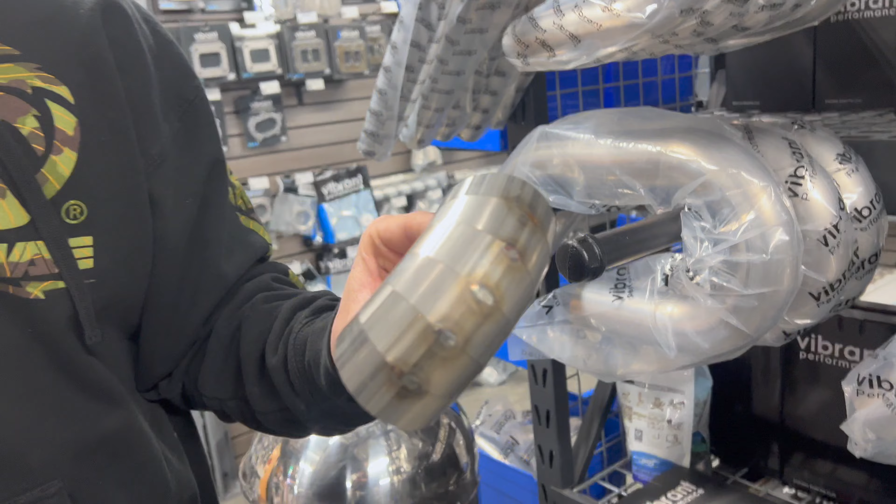We are setting up the bump stops right now, trying to figure out how to take the nitrogen out of the bump stops so we can set the height up on it. We need to decompress one of them at least and go from there.

I'll show you what we've got done so far on one side. So all the electrical, had to tear the fuse box apart, pull all the electrical out of this side. Most of it's wrapped up there, the ECMs and all that stuff, or whatever they are. I don't know that much about it, but this guy's tacked.

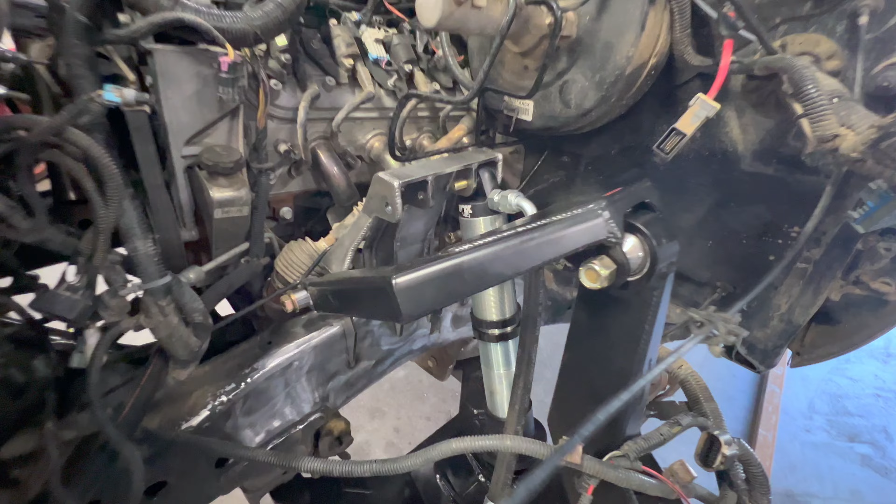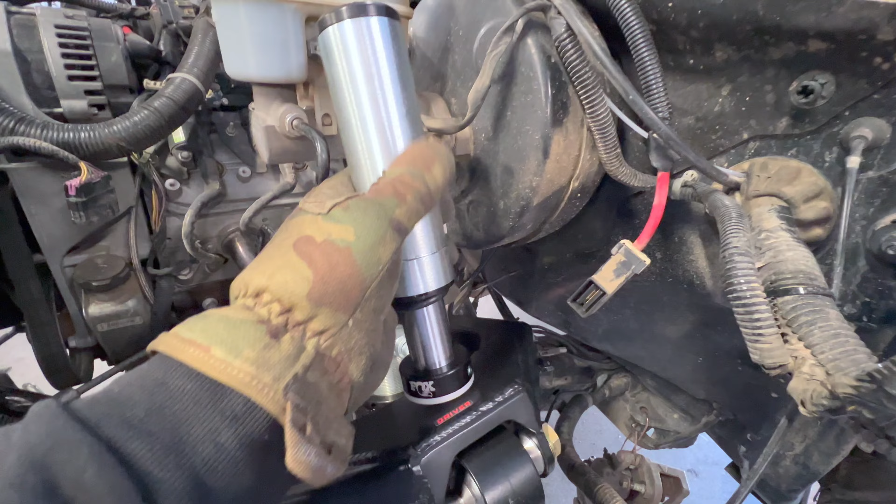Now we moved these brake lines. We had to spread them because the bump stop is going to sit pretty much like this. That shit is all in the goddamn way. It'll be sitting more like, I guess, like this, actually. Compressed right here.

Here's the kit, she's nasty. We still got to plate the frame. All that's got to be welded in. All their plating's got to be done.

Sean's going to draw some stuff up in Fusion 360 to mount this guy. We're going to plate it in real nice, and then we got to build a brace over the top, relocate my fuse box, do a bunch of wild shit like that, and then keep moving.

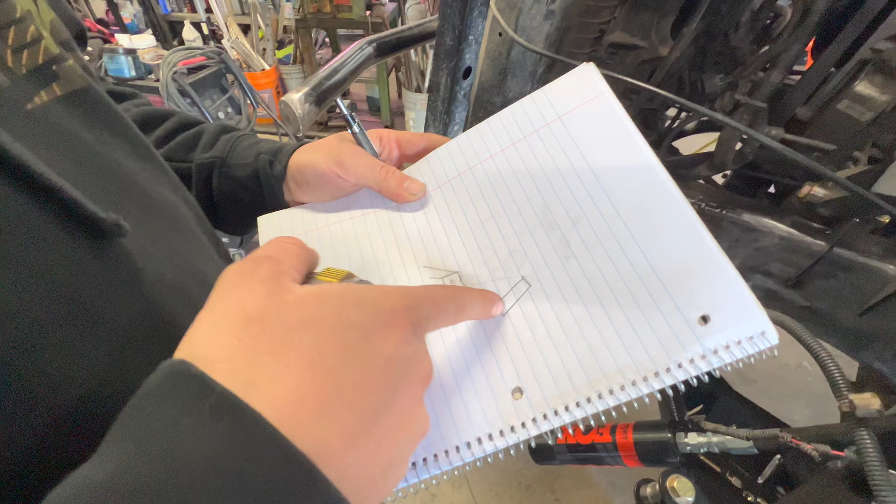Locate where that bump can is going to be. And then we can maybe even take another triangle measurement off the back. And in theory, that would give us the location of that bump can, I think. Right? Yeah, sounds good to me. We can get in the general vicinity, then we can just cut and weld as we need to.

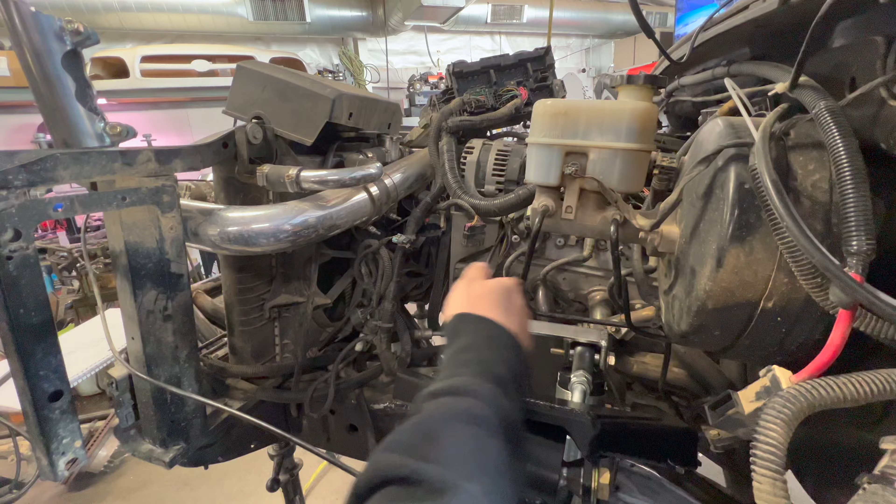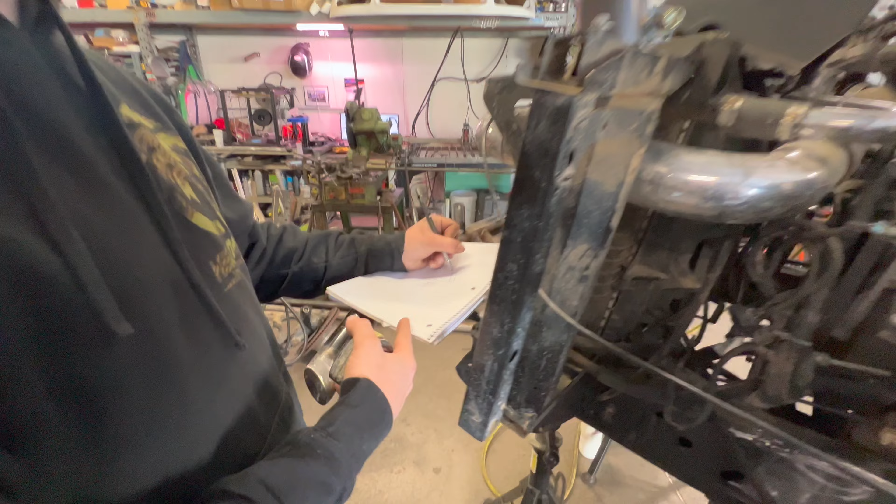Yeah, we'll have some play to go like this. We could also take a reference of this angle here with an angle gauge and this angle, and that'll just be more information we can plug in. Then we could probably do it with one triangle.

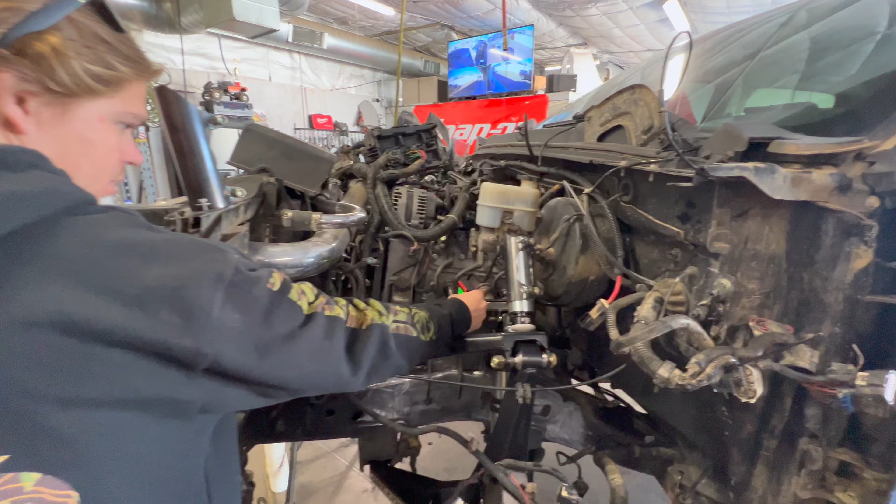Okay, so if that's our 0, our bump can here, take a little look from the front, Ryan, see if that angle looks pretty perpendicular to this. Looks like it needs to come up in the back a bit. Yep, looks like she'd be hitting straight on pretty much.

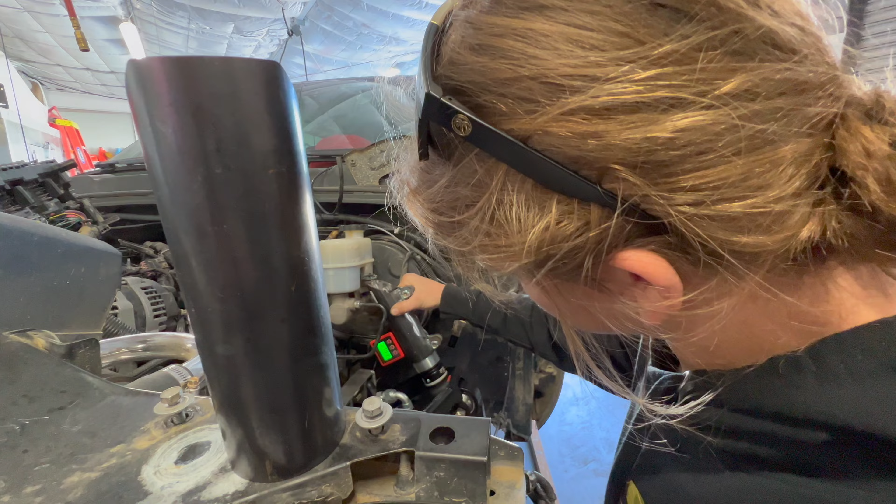Okay, what's that reading there? 58? Bunch of shit, 57.9? 57, yeah, 57 and a half.

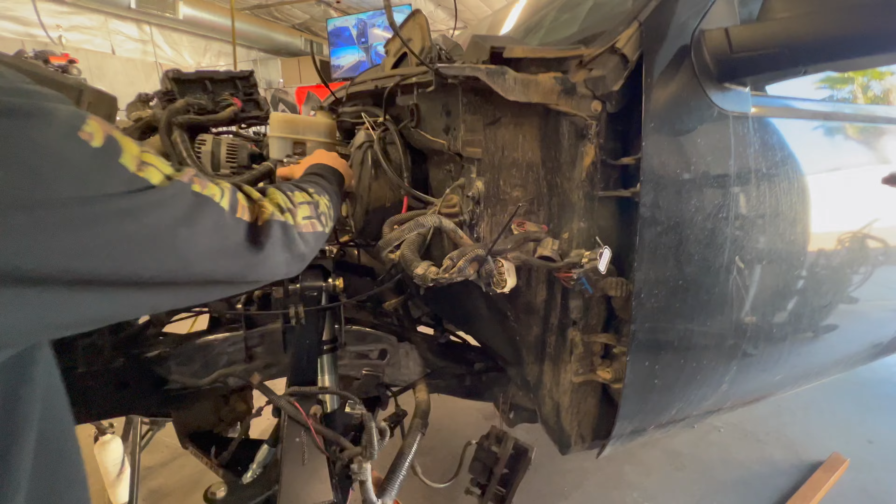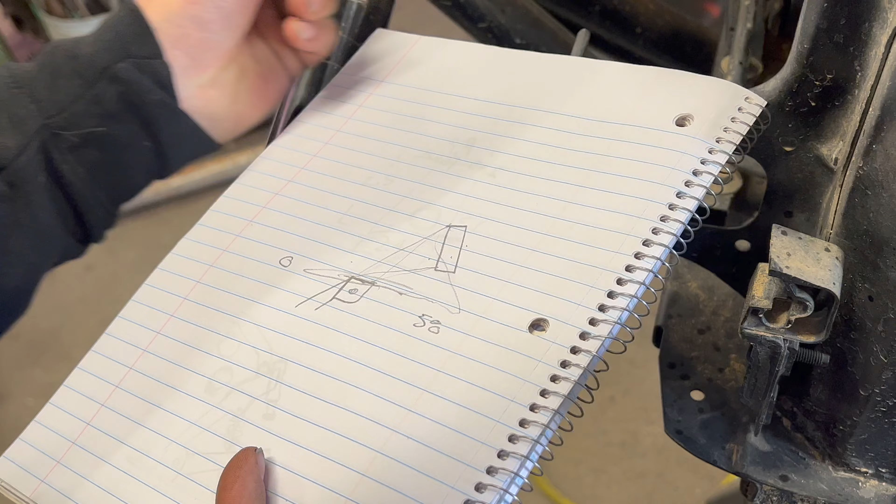This plane is 0, right here, this is our 0. This angle here is going to be 58, and then we just need that measurement, and I'll be able to go into Fusion and locate that tube, and then we can draw our brackets on there and mess with it, as opposed to sitting here with cardboard trying to figure it all out with scissors, cutting, and we can make it happen in there.

So, the old laser cutter, eh? Yep, let's get this kind of held about where you want it, and then let me take 2 measurements off here that we can use.

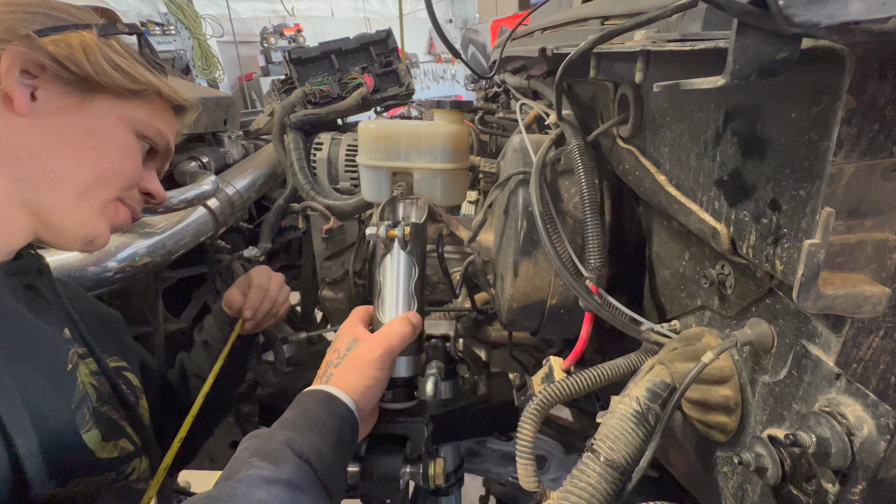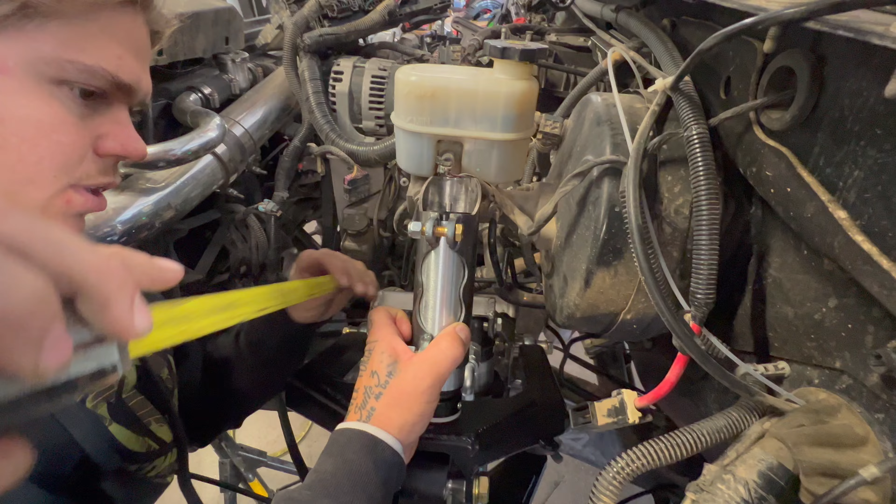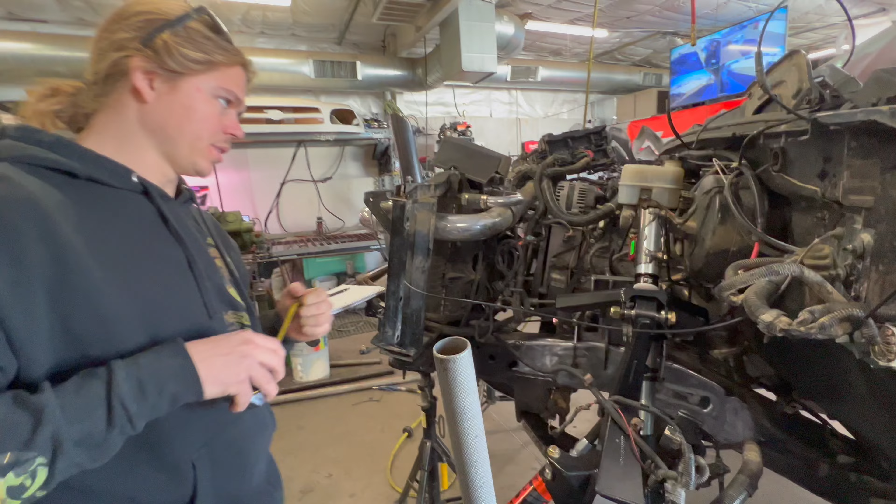It'd be important to probably keep that on there, that way we can make sure we're still around our 58. It's got to come up from this point to, let's call it 6.5, and then the lower end, it's maybe about -- can you move your ring finger? Like 4 3/4. 6.5. 4.5. We need one more thing, which will be distance between where I reference those measurements. Call it 5 for now. Okay.

Where is the bump can, just so we can kind of take a couple measurements off it real quick? Sure.

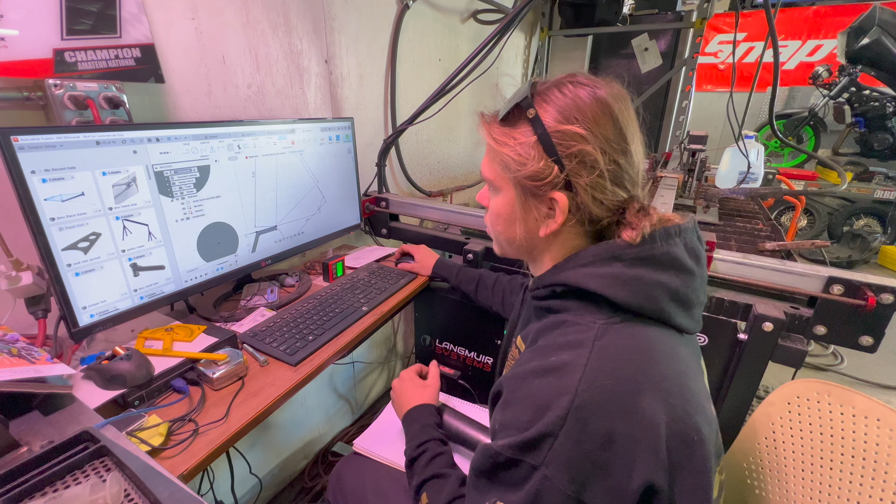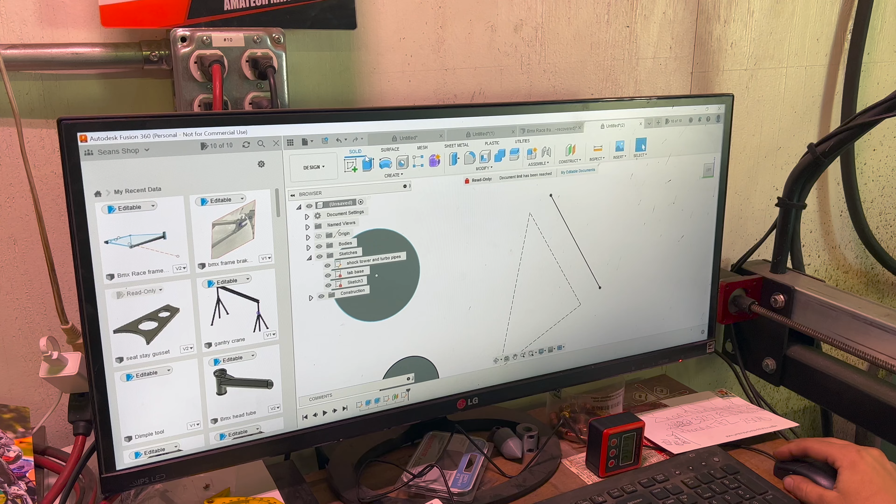Okay, beautiful. So we know that this thing is 2.3. So I'm going to go over here and I'm going to create an offset off of this, and I'm going to go 2.3, but I need half that distance. So you can put math right into Fusion, so I'm going to divide that by 2. That's the center line of our bump can. This will be the back edge, and then I'm going to finish this sketch. I'm going to create a pipe right here, and this section we want this to be 2.3.

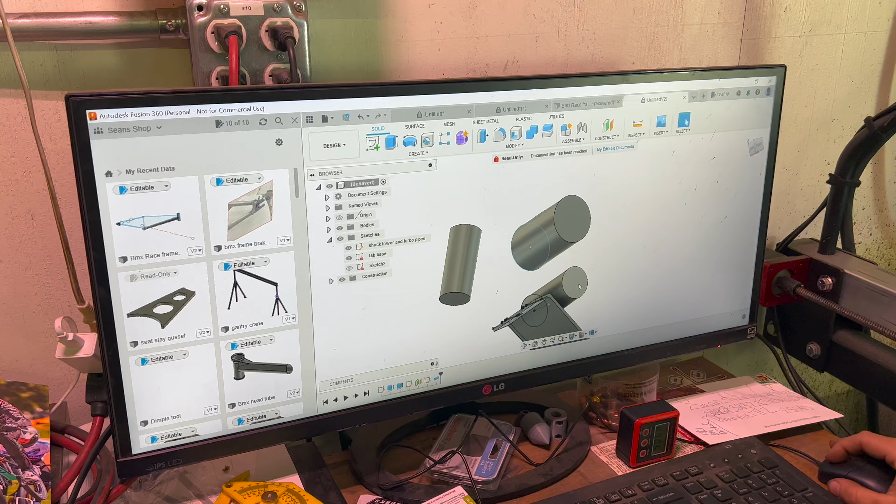Okay, so big old pipe. I kind of got our turbo pipes in here about where they need to go. We can adjust them if we need. And then this is the angle of our bump can, and we need to build tabs from here to here. Looks like it's going to clear the turbo at least.

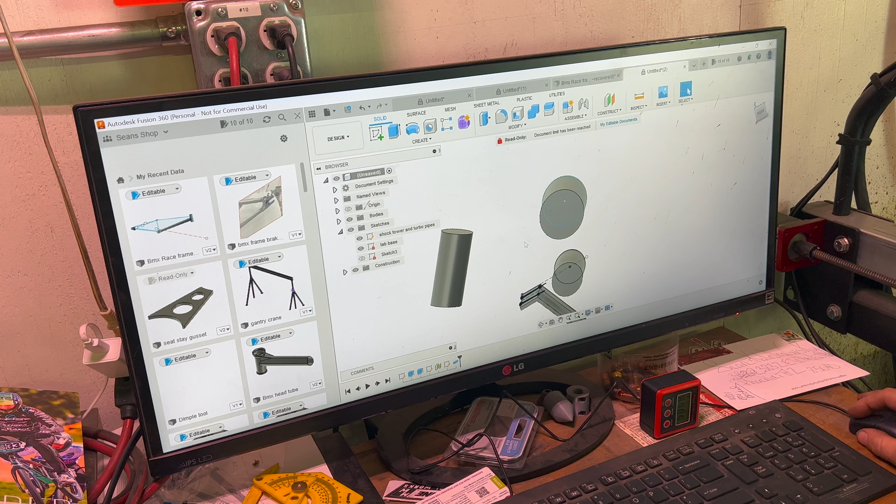Yeah, the biggest thing we got to worry about on our turbo end is where we incorporate our cross brace strut coming over. So this might get in the way for that. This might be pretty tight once we start building. If you ran here, the mount up high for the cross brace and kind of went up over the top of that.

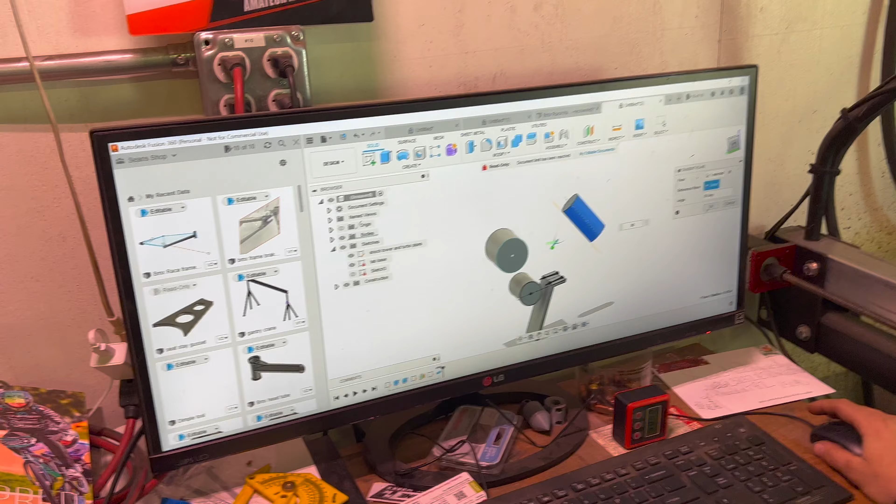Connecting multiple points on Fusion can be a tricky endeavor. So now we have a plane we can sketch on, which is basically the backside of this bump can. I also want to construct an offset plane off this plane and bring it back a little, because I want to grab this bump can a little further up.

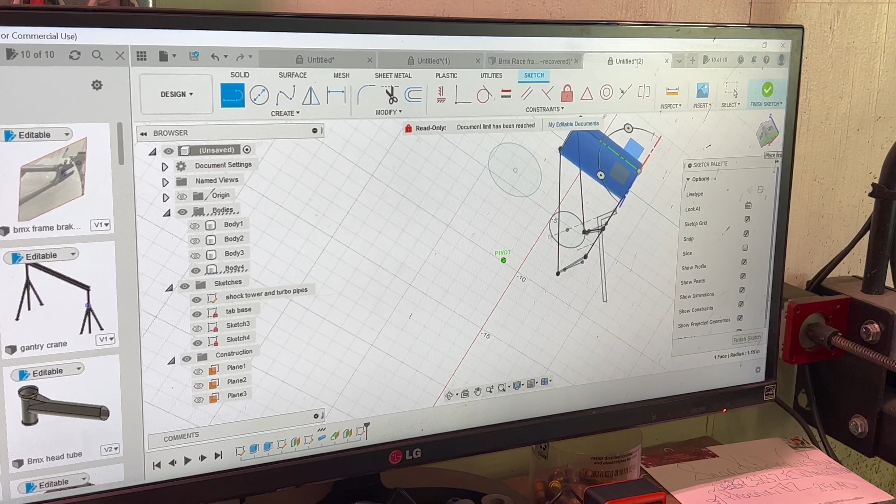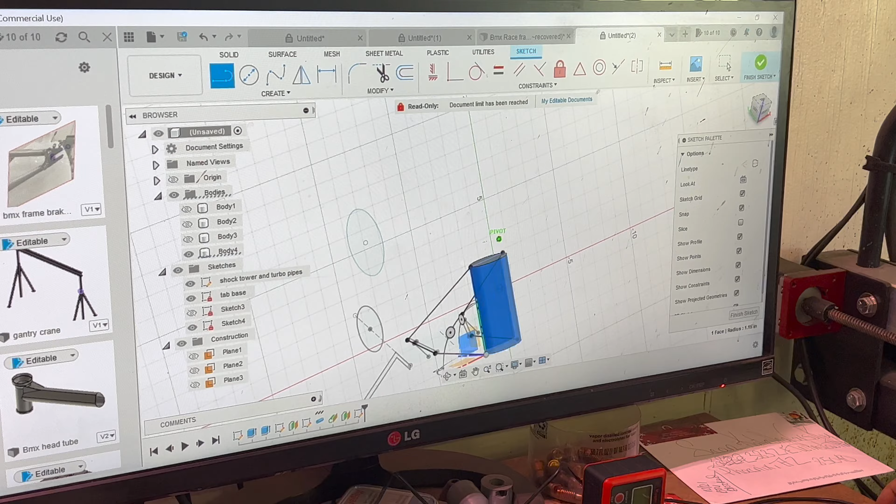We're gonna have a problem though. If you look at this, it's kind of hard to show, but it's not a flat piece of metal that has a bend in it the way that it's showing. So really we have to put a line somewhere. We need a midpoint that we can bend across, because you can build sheet metal that way, but really what we want is our shock tower point here, one bend line somewhere, and two triangles.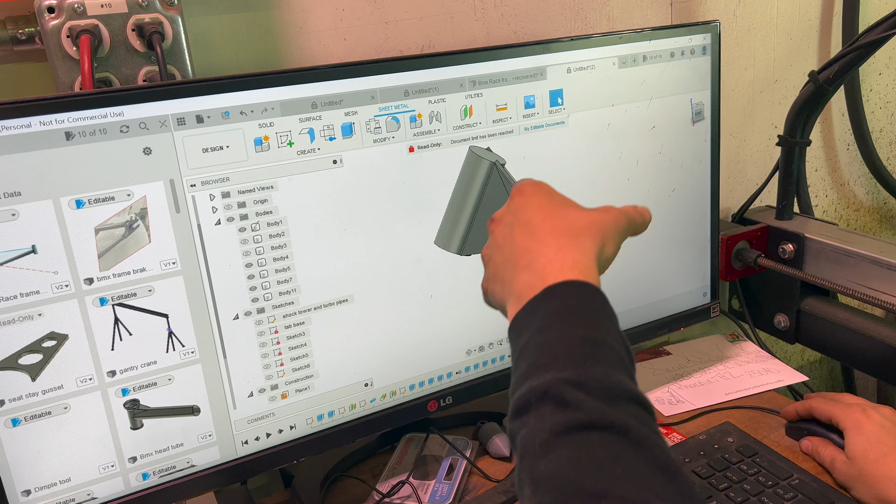Alright, it's still kind of in its early stages here. The bump can is longer than this — these are just where my reference lines are, so it'll stick out the top and the bottom. We'll have some adjustability on our height, but that should be about the right angle.

And then we can come back here, and wherever we need to, we should be able to pop tabs on here and drop our cross member bolt-on deal in anywhere on the back of that. And if some holes — you got flat spots for the holes to go through, or you just gonna tab off the top of it? I'm gonna tab off the top with a separate tab.

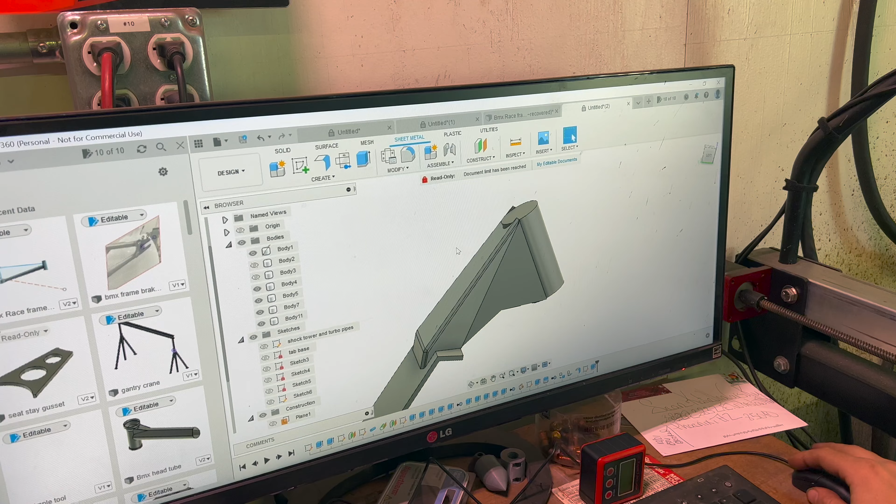Okay, and then this should be our turbo pipes, just like that, somewhat. We should maybe even cut the tabs we already have for it, cut the ears off of them and just tab right off the back like that. Fortunately I have a tab cutting machine right here, so we'll be able to custom cut whatever tab we could possibly need in the blink of an eye.

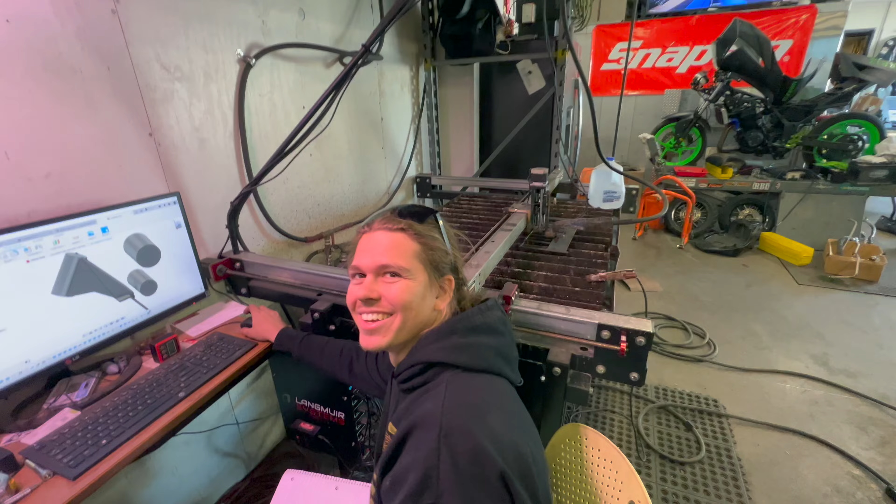Kruesi hasn't experienced that. No, I don't have that luxury yet. It's old school — he does it with a pen and paper. Pen, paper, Sharpie, and a drill. Goddamn drill and a saw.

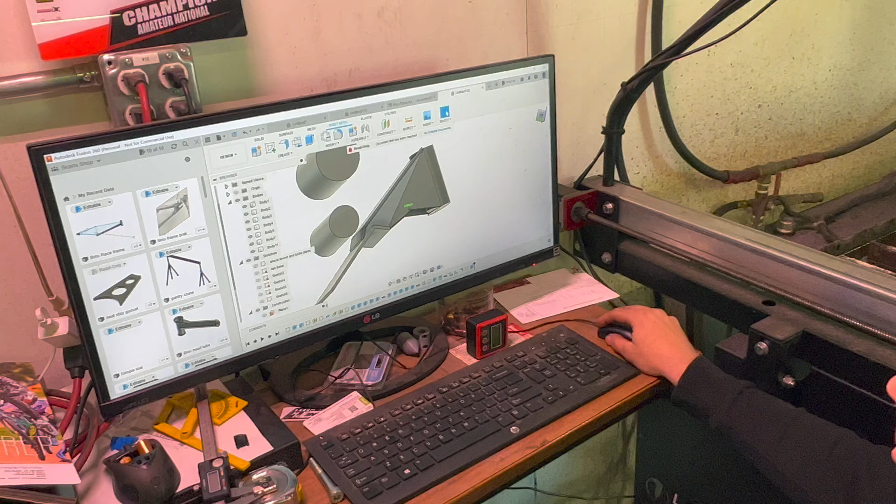But yeah, we can come box this bottom in too with a piece. The only issue with this model is I can't follow sheet metal rules on this, but I might be able to convert this to sheet metal. Let's see here — that's about how we're looking.

There's not a whole lot of grab on the back of the shock tower, but we'll have to do what we saw where they reinforced on the front, maybe, for that extra strength. Run some tube down or something eventually. Real life, you know?

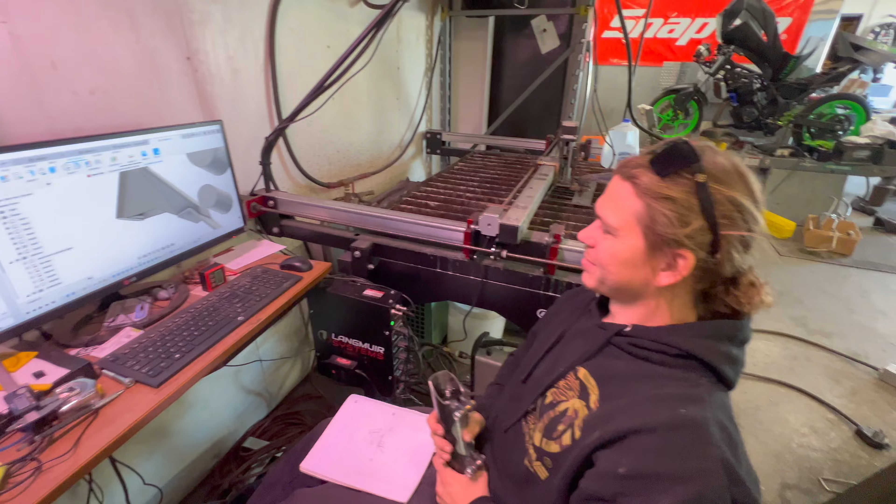It's one thing to draw it on a computer, but let's see if we can build it. Rip it out, let's go. All right, let's see how good you are, Sean. It's all right, test — we're going to find out right now. Today is the test, okay.

Body 7. Let's isolate this. Is this a Nag Champa stick right here?

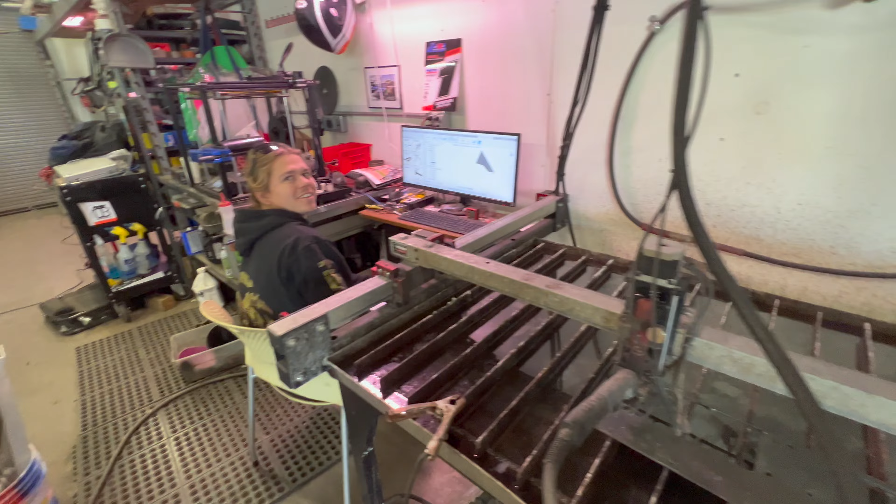It's some incense — Nag Champa, is that what you call it? Nag Champa is a type of incense. You see that cover right there in the floor? That's a septic tank. Whenever I run the washer dryer, that thing fills up with water at a rate where a lot of stink comes out, so I gotta burn some incense on those days. All right, fair enough, little Nag Champa there.

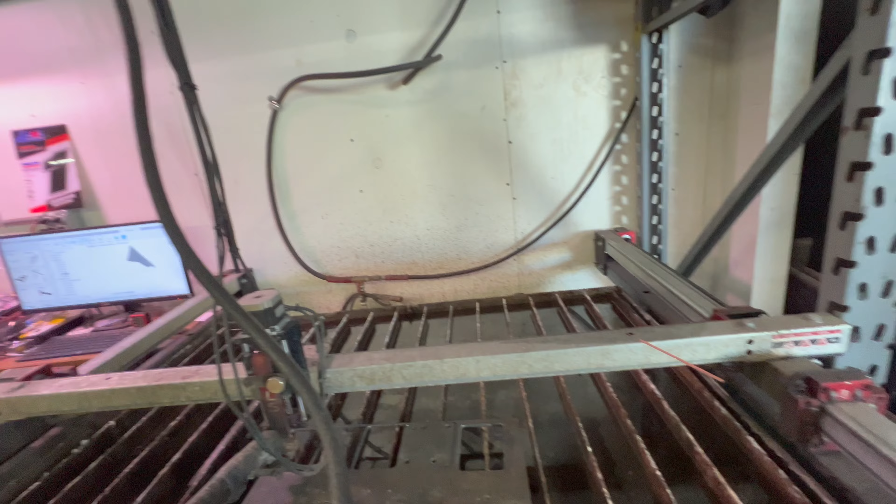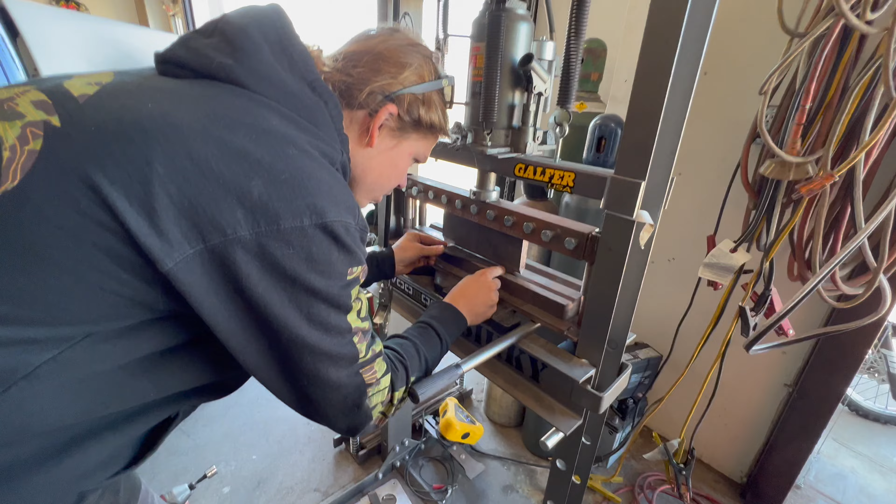It's gonna be really hard to measure the stop. Oh, fuck.

Where'd you get the finger adjuster up there? It's 3D printed, but it's from Swag Off Road, so you could 3D print one if you wanted. There's a little magnet in there, and she just...

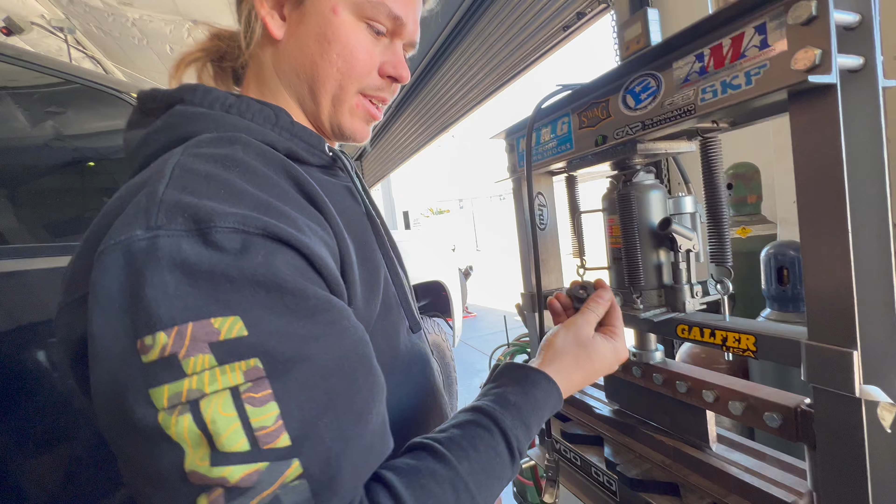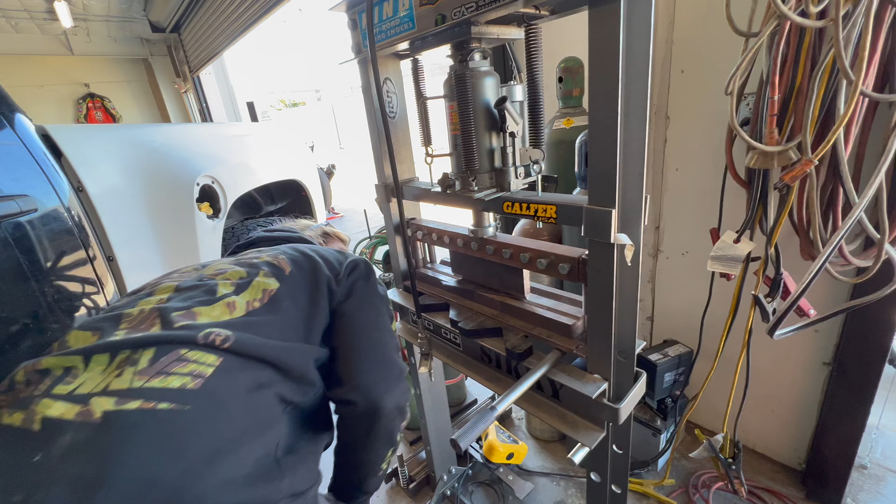Alright, yeah, give it a go. Let's see what we can get here.

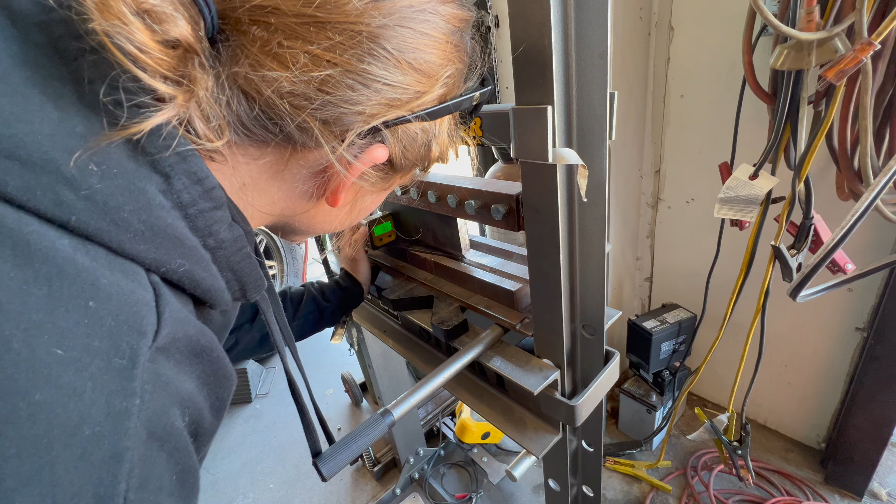Normally I throw an angle gauge on. What did I say, 26? Well, I don't know, wasn't listening. I said 26 — I know there were some numbers being rambled off from over there, but I was pulling some bolts out of things. So half of 26 would be 13. When we read 13 on that...

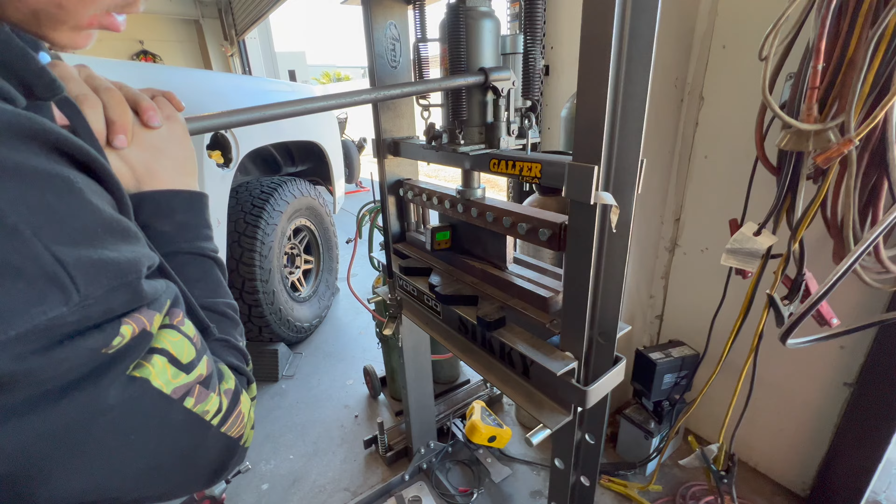Nope. It's not bending how we want it to bend. This might be a problem.

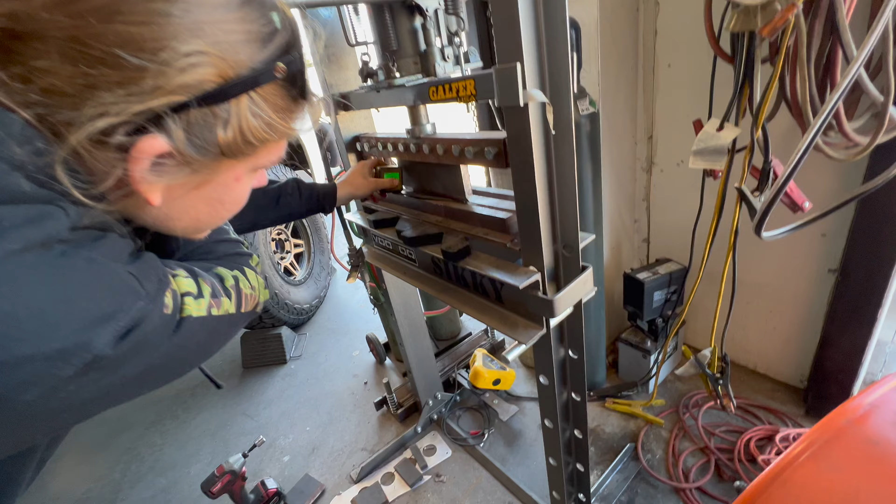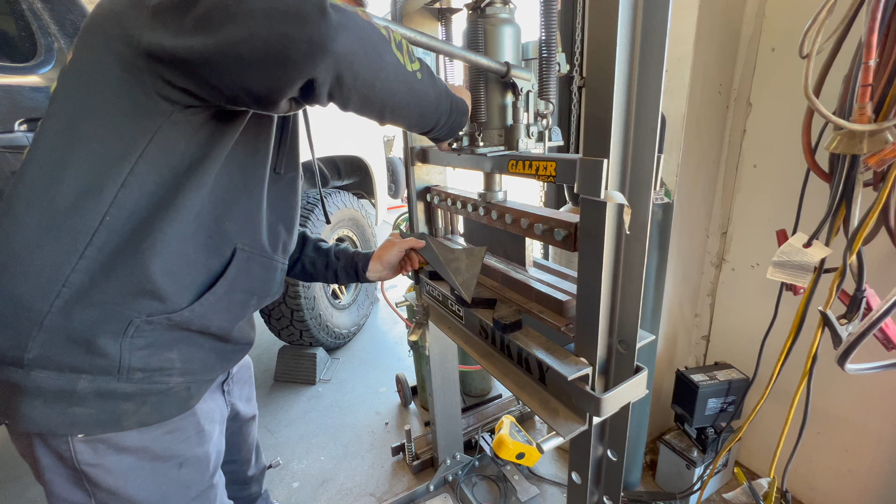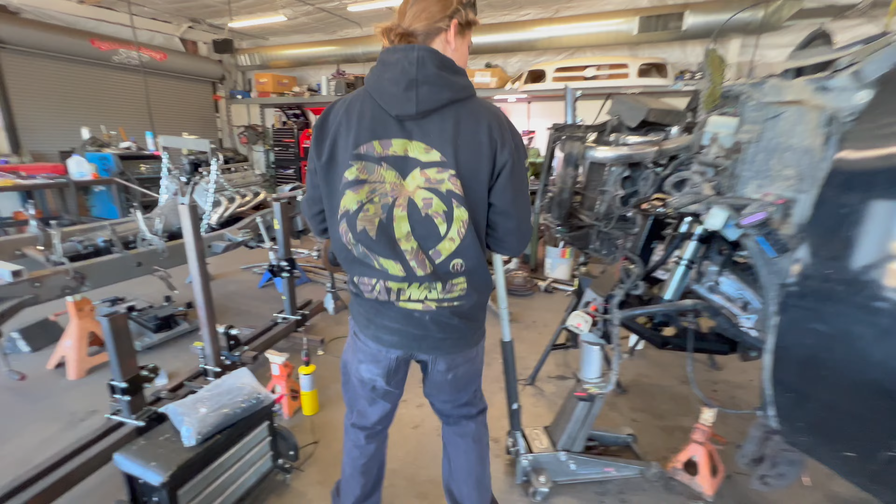Oh, you passed her. Yeah, it's not bending evenly. But it's pretty generally what we're going for. That's just a little hammer. You got an anvil, right? Inside, about like that. And then where's the bump can? Right by you, left.

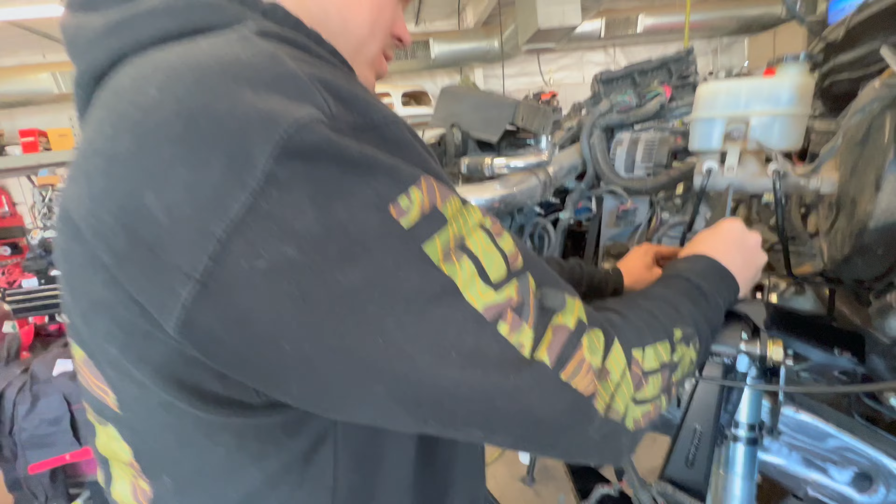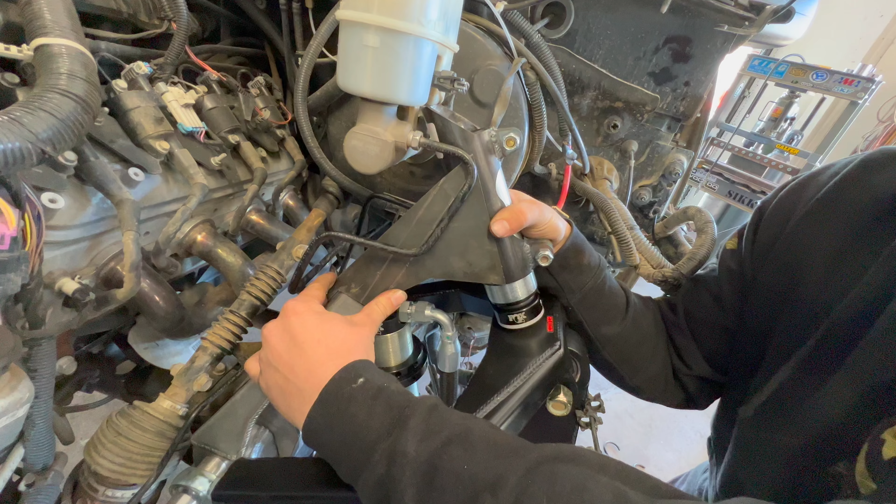Perfect, let's cut another one, see how that looks. Then we'll build our little back cap plate. And then we can just tack all this shit on, dude, and we're on our way to old bump stopville.

I don't want to do that by hand. Those things have been on there for eons and they look pretty rusty. I think they were on there when I bought the truck, actually, and I've had it for quite a few years. Hit them with some WD. Oh, where's the WD? I think I've seen it.

Yeah, we are so close to having this thing on some tires, at least. That doesn't mean it's close to being done whatsoever, but close to being on tires is nice. I'm going to rip some hubs apart and put them on and maybe see what a tire looks like.

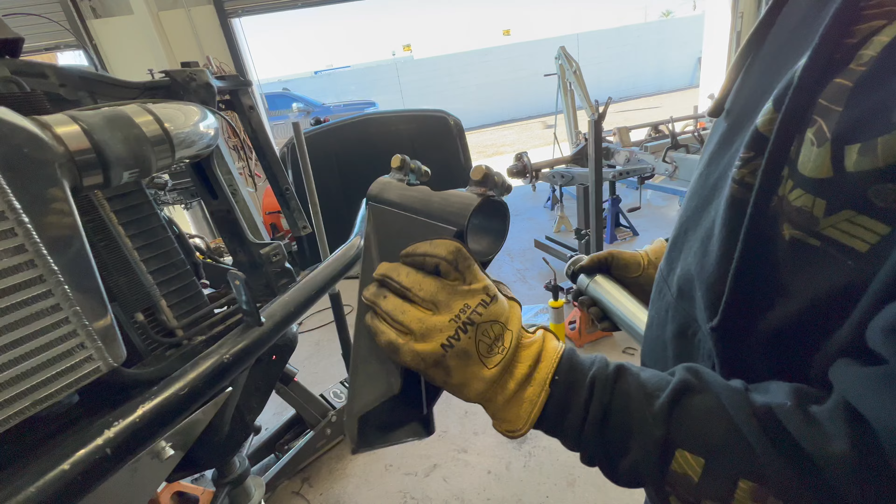Check out what we made. We'll plate it in, bump can holder. Let's see how she lines up, huh? This looks nice, looks like we know what we're doing, but let's see if it works like we know what we're doing.

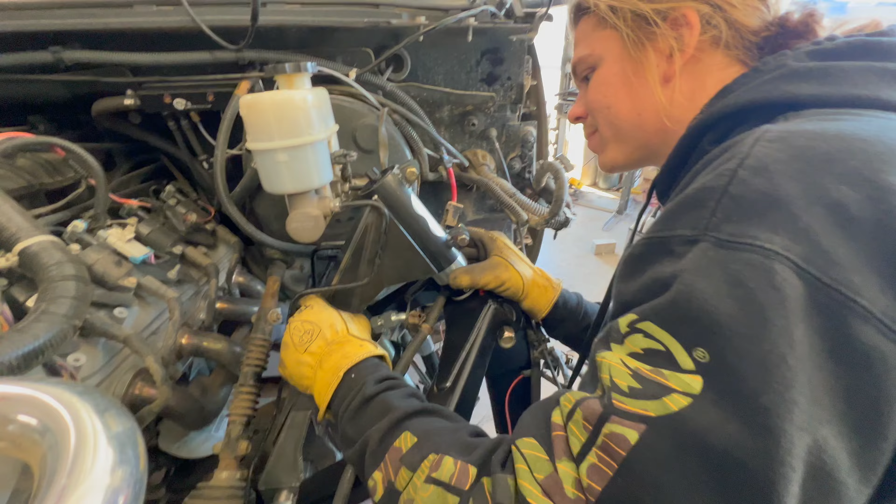Pretty close. Pressure is high, still got a little bit of pressure in it. I think that's from... keep it off that brake line.

All right there, just got any gap at all? Yep, it definitely does. Well, it needs a little bit, something like that. Yeah, I could probably bend that out a little bit too. Tightened in here. Bend what out? The brake line, I keep looking.

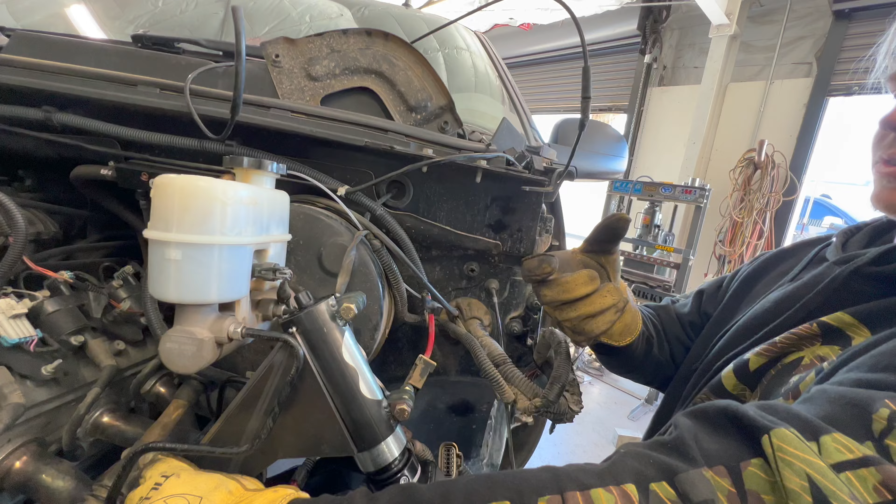Look at that. I'm gonna put two more tacks on it and just double check it once more with this pinched and fit nice, and then see how this is clocked a little wrong. Bust it off and just turn that way just a little bit, clock it like 2 or 3 degrees.

We're really on the edge over here, but I don't think it's gonna be a problem, you know? Yeah.

It looks pretty solid. Eventually we could run a hoop off of here down to there. Yep, and even one would help, but two would be better. This side will probably be easy to run some hoops off of, but... yeah, the other side's pretty open up here too.

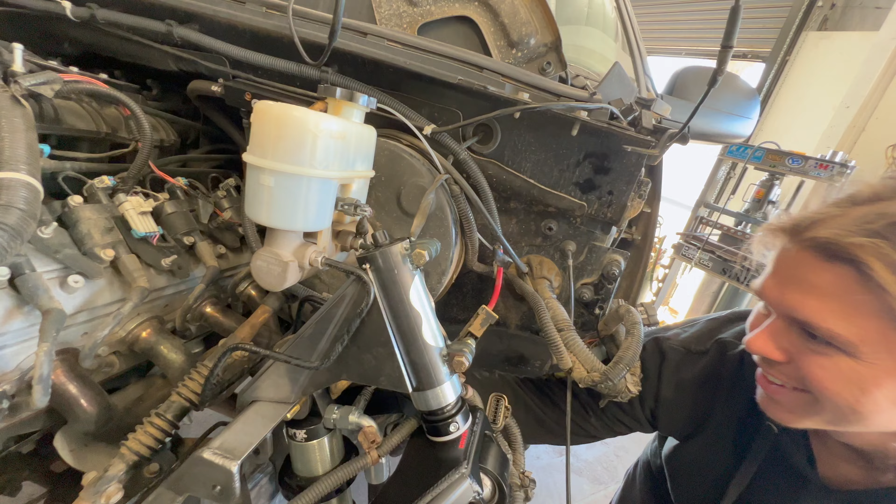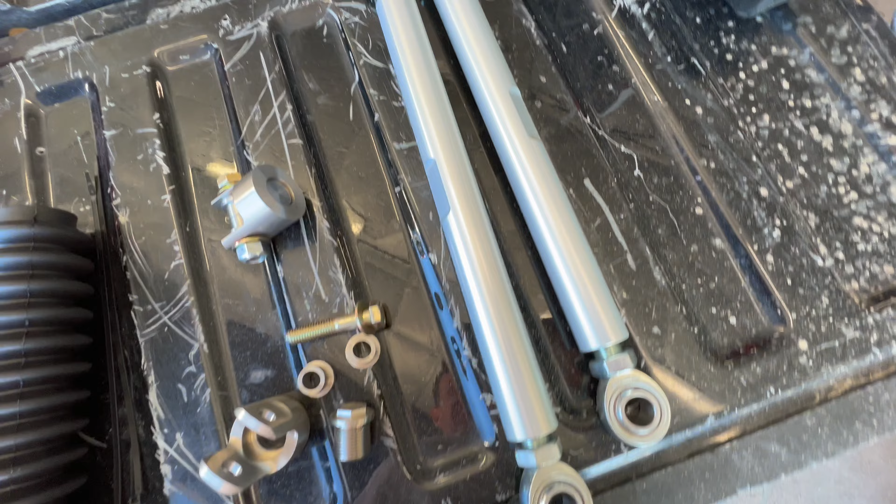But check that out, dude! Styling, we're there. That didn't take all day either, which lots of times this shit does. Look at these bad mothers, the tie rods right here, these fancy knuckles, all CNC'd parts, straight down to the bolt.

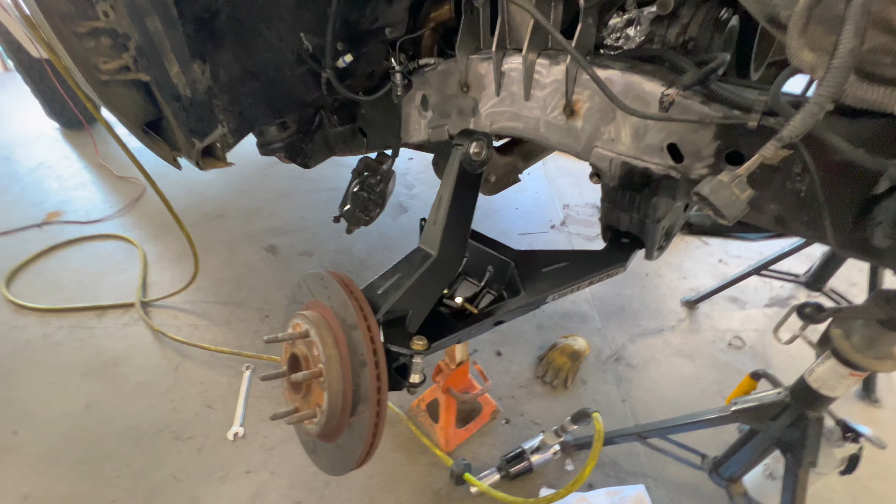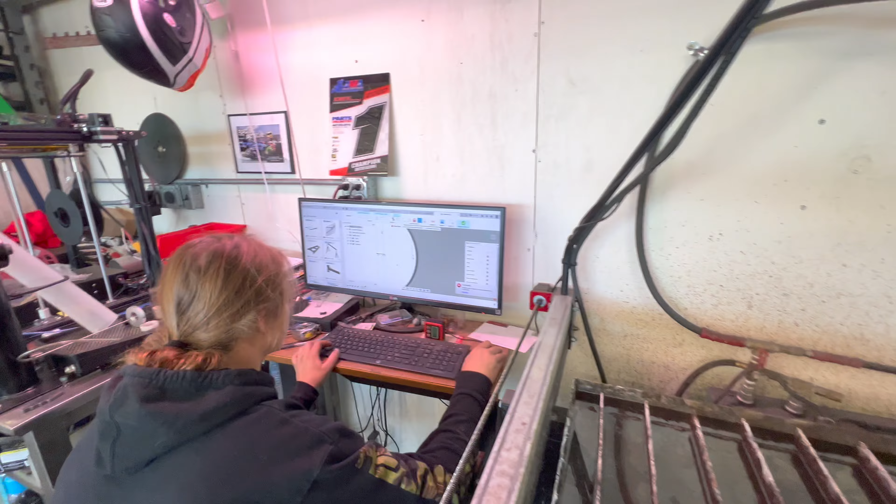I'm finishing up the lower arm and spindle on this side. Gonna put the steering arms in, not attached. Just get all that stuff bolted up as much as possible while Sean is still making parts over here. All kinds of little goodies. Built this part here, looks halfway decent. Make a little piece that boxes in underneath, and then I will go over and weld it all up. And we'll put it on the truck, and that'll be one side's bump stop mount complete.

Which is a pretty good amount of progress for what, like 2 hours, yeah, probably we spent on this. Thing looks beefy too, not bad for 2 hours worth of work.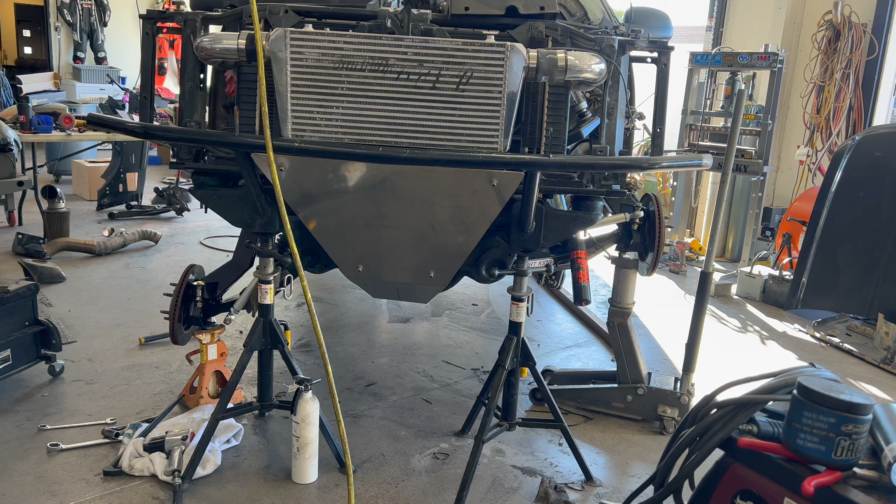Let's go, look at that. You see side to side right there? Right now at the hubs, I'm at like 15 and some change inches of travel. When the tires are on, point to point, will probably be 17 or 18.

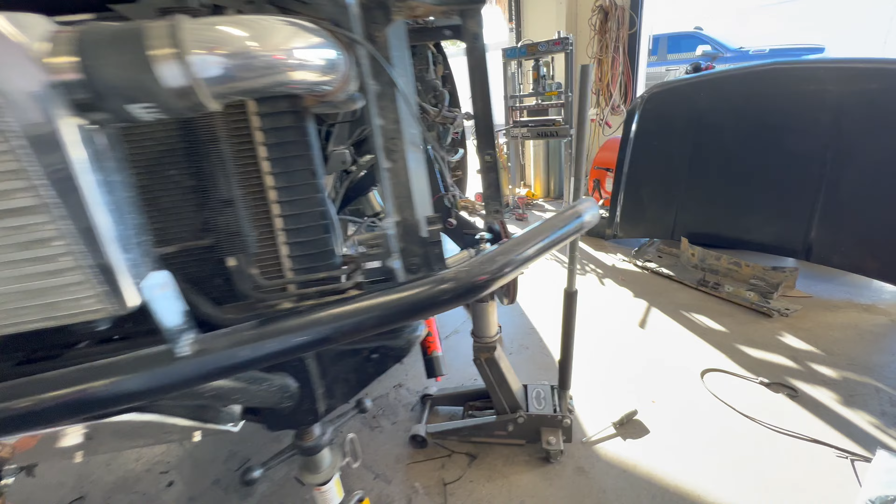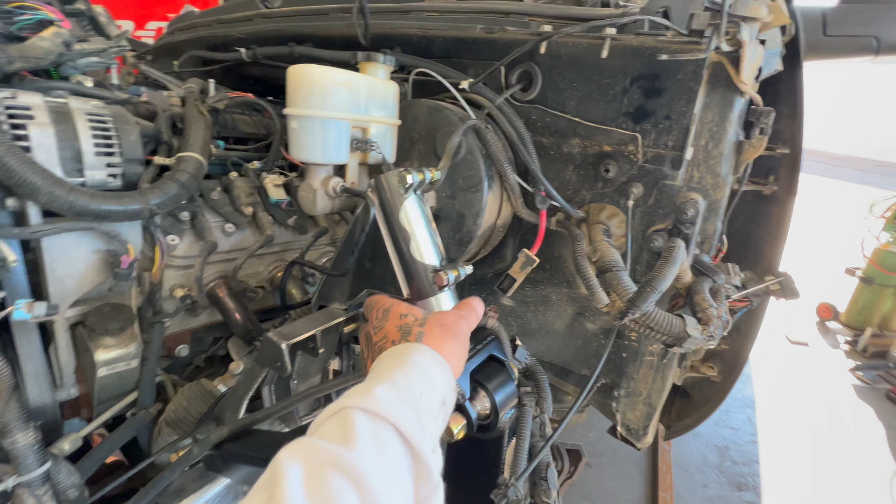All that wiring's got to go. Fuse box has got to be redone. Gonna have to build a mount for that. This has got to be finished. We're gonna build... I think he's just chilling right now. Tack him up. Then we got to build a support that comes off of here, up and over the motor. Then we're gonna brace this thing too, also to somewhere. Don't really know where.

That's a huge arm right there. But she's gonna be nasty. Look at that thing, woo! It's all mock-up too, it's all gonna come back apart. All this stuff's gonna come apart. We're gonna paint it when it's all finally done, said and done. She's full droop right there. We'll probably strap it like an inch shorter.